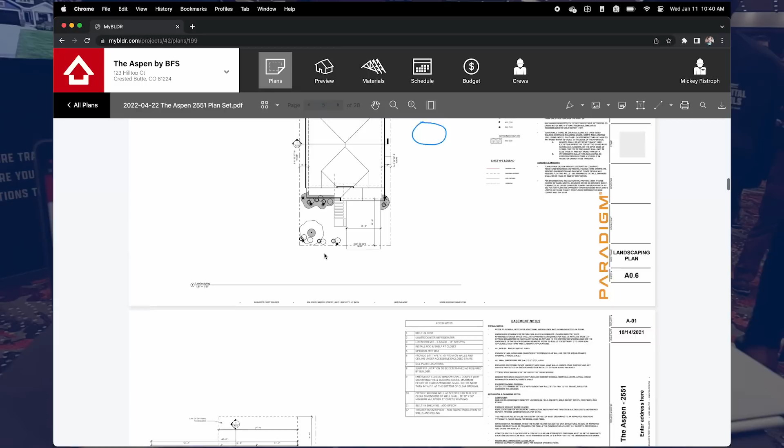And this is first and foremost, this is, you know, document storage for everything you need. We've got the plans, but advanced renderings, videos, you got all your files here. I'm gonna click into the main plan set, and we've got all these sort of rich viewers built right in. So this isn't like your downloads folder and futzing around with that.

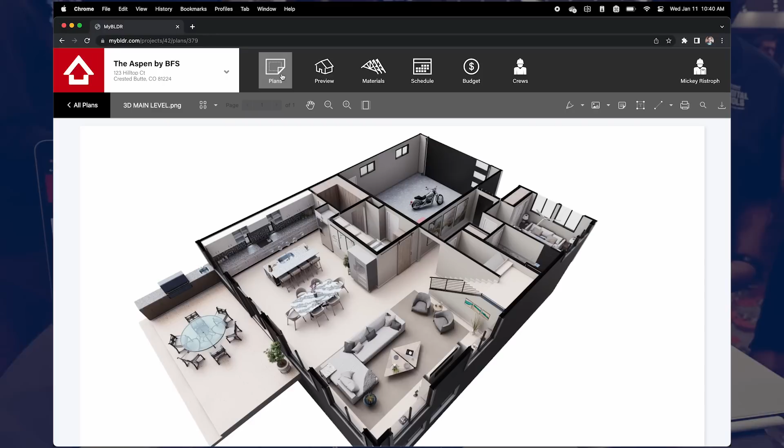Wi-Fi is kind of slow here, but right when I click into this, what it's actually doing is rendering that whole plan set right here in the browser. So I can go through here, and when the Wi-Fi catches up, you'll see I can get into anything. Not unusual for us on a job site to take a minute for something to download. Yeah, not too bad though, right?

Not bad, it's, you know, it's not a video file, so it's not a ginormous file size, right? Exactly. If you're familiar with plan markup tools, you got all kinds of powerful stuff here.

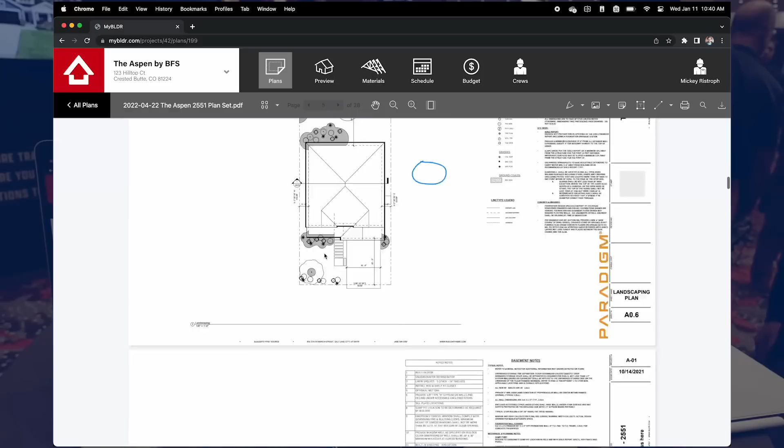So if I'm working on, we know we're gonna have to rework the roof angle on this part, right? All your usual markup capabilities with all of your files in one place. Jumping over to preview here, this is where that other one I mentioned gets super interesting. I'm gonna actually hand it over to my colleague, Kelly.

So with Home Configure, what the product is doing is taking that same 2D plan that Mickey just showed, turning it into a 3D model, and then actually showing a photorealistic visual of that model. There are a ton of features that go into this thing, but I'll hit a few just to start.

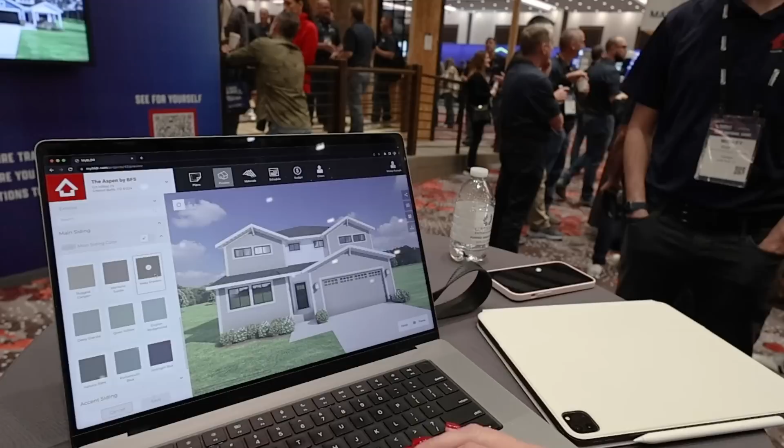So the first thing that we can do is we can change all of our different exterior products. We'll just change the siding color to show you what that actually looks like. And then in addition to that, we can actually change fit and finish details.

When we go to the inside of the house, we have a full 360-degree view. We can spin around in a circle, look at different plan options, and begin to change things like flooring details and wall details as well.

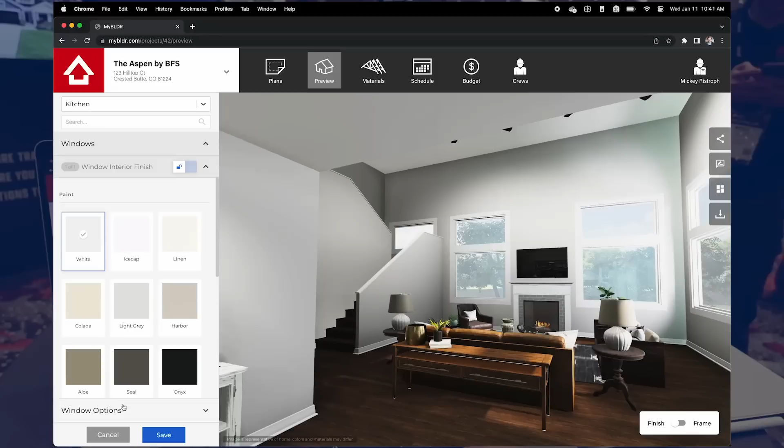If I open up the window options and turn them on, it's going to change the actual geometry of the house, where we can see upper windows added and more light coming through. It makes it a whole lot easier for buyers to see what's coming from the 2D plan and turn that into something they're actually going to walk into. What we're trying to do with the product is give the everyday buyer transparency into what they're purchasing, much like how we purchase a car today online by configuring it.

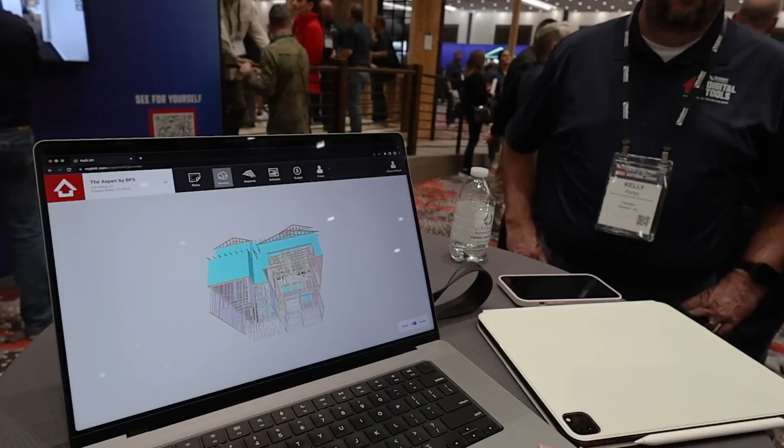So there's all kinds of things we can do with this 3D model. Another capability you might notice is this finish-frame toggle down here. I'm going to switch to the frame view and look at this. We've got a full three-dimensional framing model of this house.

This is all accessible on your iPad and everything else, so if you need to double check, you know. That's the best part of that—showing clients, but for me, actually on the job site, that's the best part right there, for sure.

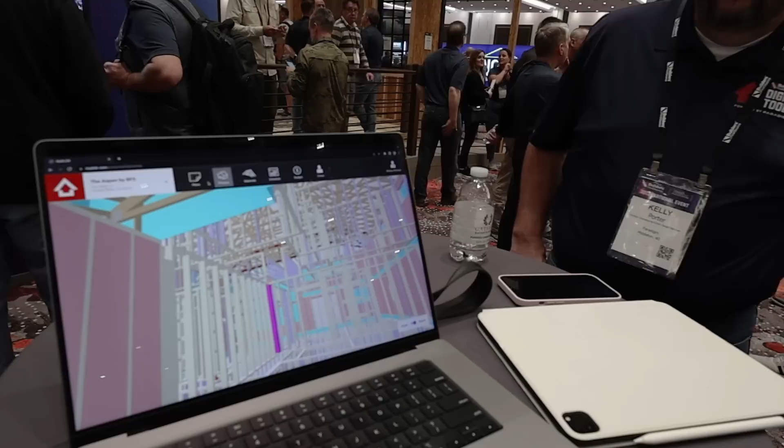So we've got this full framing model, and this is fully connected to your suppliers like Builders FirstSource. We build this model to get your material lists right, and that's available in our materials tab too.

This is when you request your bid from your OSR at BFS. They do that full takeoff for you, organize it into your packs for delivery, first floor framing and so on. What the materials section does is give you a comprehensive dashboard on the million parts it takes to build a house. This is organized by each delivery you're going to get—this is the first floor framing that's ready for purchase.

You can click into it and actually place the order right from this thing. This is the first time we're actually transacting online with our builders. And of course, you can always call your sales rep, we're here to help, but you can do all this on the go. And it has the address and everything already built in, right here on the job itself.

It already knows if it's a crawl space or a first slab or anything like that. That's helpful. And as that build progresses, once we place that order, we confirm it, you'll see when the delivery is coming, you'll know exactly when the materials are out for delivery, and best of all, when it's delivered you get job site confirmation and delivery photos of the drop off at the job site, all within this one platform.

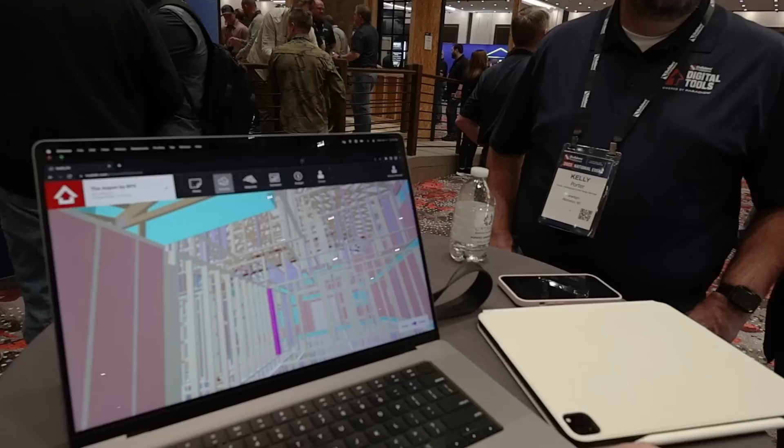So that's materials. The next thing I want to show you is back over here on schedule. How do you do your scheduling now? Buildertrend—yeah, we know there's a lot of software out there like that. Scheduling at its core is a list of materials, and you can do all the usual stuff you'd expect in here with your task groups and so on.

The really exciting thing for our schedule and budget tools—let me jump over to budget, it shows it best—is that again, this is all integrated. The cost, your jobs with BFS, your orders with BFS for this project, fully integrated here. These are the ones from BFS, so those are automatically imported into your budget. Of course, you can add all your other costs here too, all in one place.

And then crews, this is where we think about managing—one of our guys told me he counted 550 people setting foot on his job sites. We know it takes a village, right? So what I want to show you here is how we keep all of those stakeholders on the same page.

Let me actually open up my iPad here. I'm going to invite in my Gmail address—pretend, like maybe this house has some really complicated masonry work or something. I'm going to add my Gmail here, and if I get this going on my iPad, this is where we're going to test the Wi-Fi. You see that email pop up, right? I'm going to tap into that.

No, let me just tap into this. So your subcontractors, they don't have to set up a password, they don't have to do anything. Literally one tap and boom, they're right in the job and get to see all the documents. No download or app to get, no passwords, no nothing.

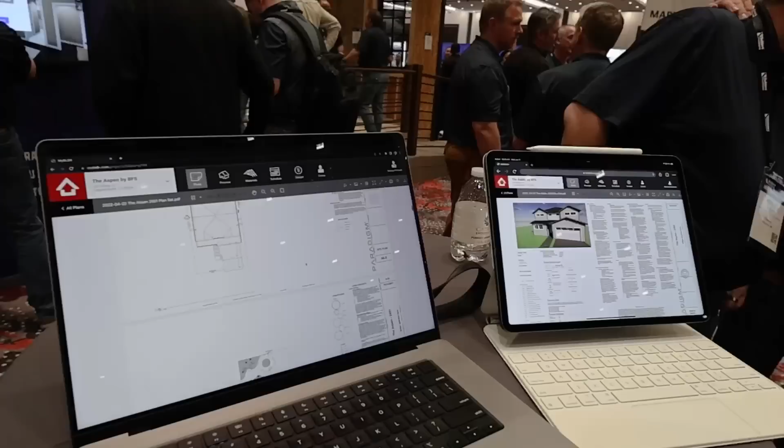Okay, so here I am as the builder, right? Let's say you're working with your roofing guy on this. And so while I'm over here making a note of something, here. Oh wow, it's all live, real time. I'm the roofing guy, right?

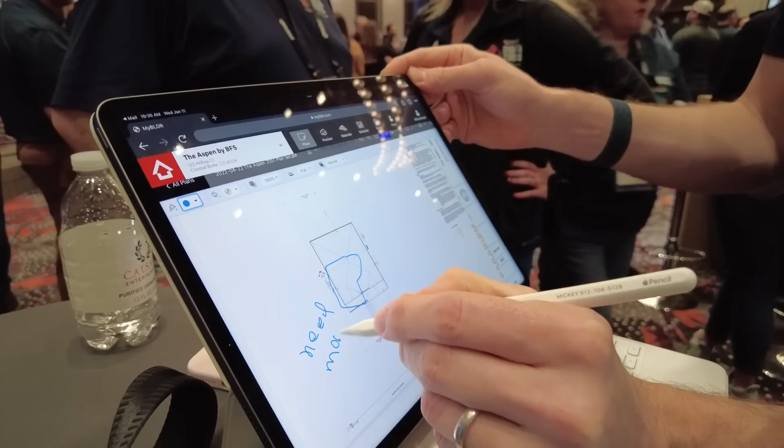We need more sheathing here. I'm making a note of it here, and then look back over there. So this is, holy cow, check it out. So it goes from one to the other that quick. Yeah, these are totally real time.

So get all of your subcontractors in this tool. Everybody's working on the same page, no more mistakes. No app, no download, no passwords. Yeah, that's the best part, because that's your problem, how much do you want another password? Yeah, another thing they got to remember.

And just to jump into my 2 cents, then all of this could go to you moving eventually to Ready Frame. Right, because the whole house is built in 3D, so it'd be no big deal for them to then Ready Frame cut your package. I've seen you do the videos of them, so it's definitely something I've thought about.

Yeah, pretty cool. And then the best part is all of this is just the beginning. This is the tools that are right out of the box, but there's tons of services you can get through us, Build Optimize. We can take that same framing model, pull it in and start modeling up your HVAC, solve all of your collisions. Those are all extra services, that's not just click it through the software itself, but start working with your local team and we'll get you set up.

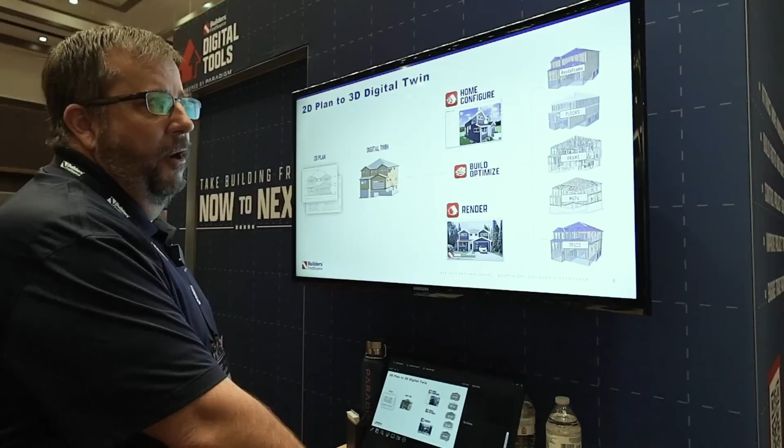So Pete, Build Optimize is all about taking a 2D plan into a 3D model, and then all the other things it's able to feed within the Paradigm offering. This is just a short little clip we've got where it shows what a house looks like when it's all in 3D, and we really start slicing it up.

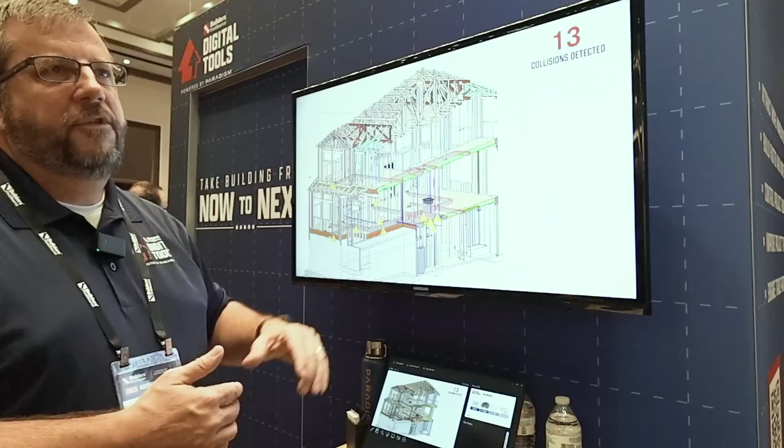And what are we looking for? Errors, issues, conflicts, anything like that happens at the job site. We want to stop predictable problems, right? As this starts slicing this house back, you can start to see where we've got issues with the floor system.

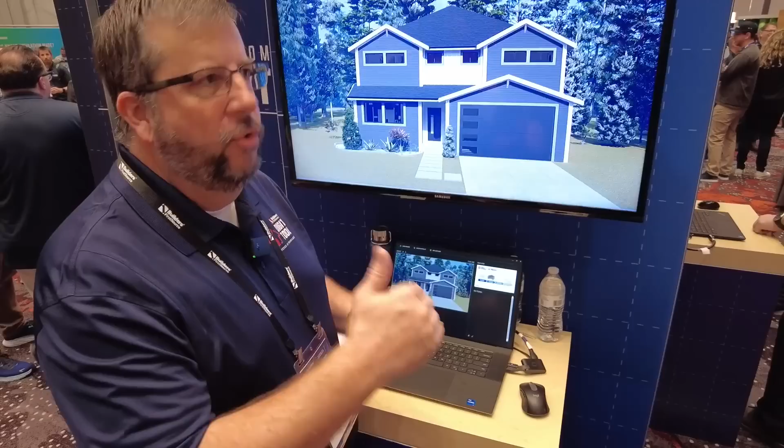We noted several conflicts within this project, having coordination meetings with all the stakeholders, we talked about it. We're not here to design the HVAC system, we're here to model it, so that we can point out those types of issues for you and any of the other stakeholders, and then have you meet with your trades and say, hey, let's move this trunk line, this HVAC system, this attic scuttle hole. This is a better location, this is where it would fit better.

Okay, so that's all about creating that 3D model. 2D plan, 3D model, to clash detection reports. Those reports are something that we use as we coordinate, but we can provide those to you so it helps you move to the next level. We're not here to replace the architect or engineer. What we're here to help do is give additional information that gets left out.

Yeah, absolutely. It's all about, at the job site, what do the trades start doing? Making those decisions that you may not be involved with, that you should be. Our workflow, again, we kind of hit on this, an execution plan. What are your goals and objectives of having a BIM model done? What do you want to look at, what do you want to see?

That's what we want to know beforehand, and then we model it, and then we do the iterative process of where we look at the model and get on the phone with you, get in meetings, face-to-face, whatever it is with your trades, and we loop back through it. Here's the issues, how do we fix them? Right, and we've done it numerous times.

There's 20 issues, we fix all 20, we find 2 more. We go and do it again, right? We just keep working through it until everybody's satisfied that we've got it. And in some cases, after we get those 3D models, homeowners look at those plans and go, can we do something different in that space? Can we move something? I don't like the way that window looks. That's something we're able to help with. Or it's like, this could be tricky to frame on site, maybe we ought to do this balloon wall first. It helps the staging at the job site. They can see how some of that stuff goes together, doing it here virtually instead of at the job site where they're wasting time.

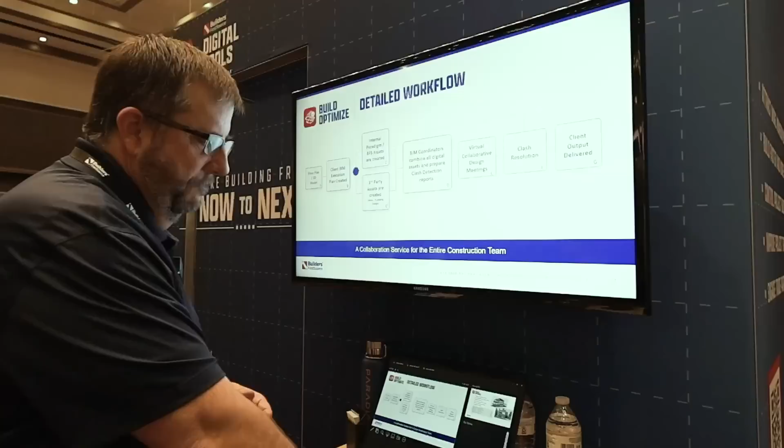One example, we were able to really slice it up - they had the HVAC system in 3 places depending on what drawings we looked at. The architect was like, I'm so embarrassed, I can't believe we did that. We helped them out. Next thing you know, the builder is like, that's why every time we built this house, every HVAC guy put it somewhere different. So we helped them really solve through that.

And it's saving money, right? You're not having the guys come back, you're not having the trades come back, you're not having hot shots for lumber, warranty issues, things like that. So it's really key, and everybody wants to know what it costs. We go with a layered approach - to do the framing, we've got a price in there, and then we start layering in the HVAC, the plumbing, the electrical. In some instances people say electrical, those are boxes, that's easy, we don't want to pay for it. Understood, so we can peel that out. It allows us a tiered approach to help budget in order to get the model all the way designed. So that's kind of a high level of what Build Optimize does for us.

Hey guys, let me introduce you to Peter. Peter is a builder that I just met this morning at breakfast here at BFS.

Peter, it sounds like you've seen the build show before. I have, yeah, I've watched your Instagram page for the last couple of years and pretty much watched every video you've made. I appreciate the stuff you put out, it's quite interesting and teaches us a little bit. And the honesty is the best policy - that's what I like the most about it. You're very honest, and I've spent the last 3 hours talking to you, you've been absolutely honest the entire time. That's the most fun thing about this. Thanks, Peter, I appreciate that.

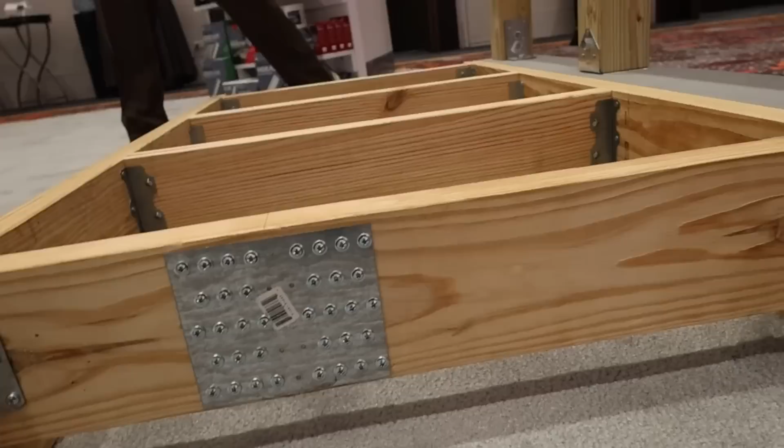Nice. Well, we're familiar with a lot of the other big guys that make them, but it's great to have options. And now that you guys are in the game on that too, that pairs well with your other offerings. We've got ClarkDietrich's metal studs, and then this is super exciting to me. Obviously, we're familiar with metal framing more from the commercial world, but I have only seen this in magazines, man.

Talk to me about Trade Ready steel joist. So you can use a regular steel stud for a joist, but what's unique about the Trade Ready is it allows for your MEPs, your plumbing, your electrical, and your HVAC and everything to be hidden in the floor cavity. That's where you get these larger punch outs.

Yeah, okay, they're typically 2 feet on center normally, but they're 1 foot from the end on either end, and then 2 foot on center, whatever that makeup looks like in the middle. So like a 14-footer, it's going to be even spacing. On a 15-footer, you're going to have like a 2-foot space in one, or 3-foot space in one of them, and then 2, 2, 2, and 2.

So regardless of where I've got to drop my closet flange and get my 3-inch toilet line running out, I'm not too far. I'm 90 this way, 90 that way, 22 and a half, and I'm out.

Right, that'll make my partner Joe happy. He's a plumber, I'm the electrician, so this is all easy for me. But talk to me about the connector at that end versus this end.

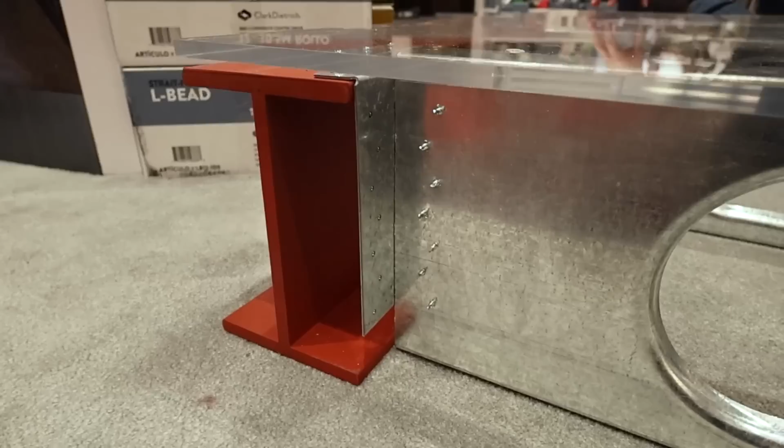Okay, so we talked about the residential versus the commercial. This is our typical commercial hanger. It's sized for a 1 5/8 inch flange stud versus a 1.5 inch wood stud. Okay, so that's what goes onto an I-beam connection.

And then down on this side, we have something called rim track. So what we do is we take a punch and fold out a tab that works similar to a clip, so you can connect the joist directly to it. It's different spacing - 12 inches on center, 16 inches on center, 19.2, and 24.

Gotcha, so this is not an off-the-shelf product? It's all made to order. The rim track is pretty normal, it really is standard, just comes on what punch you want to use.

But all the studs are made to length because you need that edge distance on either end. It's got to be fixed to make that secured connection - it can't land in the hole. If you cut it right through here, you're going to have a web crippling issue. You can't put a wall on top of this because you'll have a web crippling issue.

That makes perfect sense. So this is something that if somebody wanted to know more about, if they were thinking, I want a dead flat floor, steel's the way to go - they're maybe going to want to reach out to you and get involved with the engineering stage, because you guys have tables for spans on all this, yeah?

Yeah, you don't need necessarily to get into engineering. We have technical sales managers, and that's part of my group. They can reach out to us directly and we'll help guide them through the load tables, the span tables, and everything we have. And if we need to go to engineering, ClarkDietrich also has engineering services - we've got 4 of those offices across the country and about 60 engineers across the country.

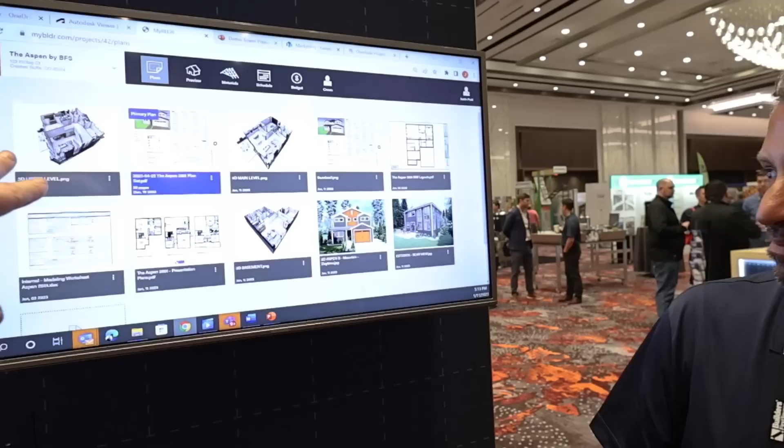That's awesome, Tim. We got a bit of a tour earlier on mybldr.com. How much of these tools are available to builders today?

Yeah, there's a lot that's available today. For example, home configure products available today, drafting, build optimize, plan library, render, all of that's available today. MyBLDR, we're rolling that out on a pilot basis starting this month. We'll open it up to all home builders registered with BFS in February with limited capabilities, but over the course of 2023, we'll continue to make investments and roll it out to more customers and more markets and continue to increase capacity.

It's exciting stuff, Tim. Really appreciate you having me out, man. Yeah Matt, we're real excited to have you here. All right brother, have a great rest of the show. We'll see you later, thank you very much.

All right guys, next up Ready Frame. I've queued up Terry, the head guy, to give us a bit of a tour. There he is. Hey Matt, what's up Terry? How you doing, good to see you brother. Thanks for stopping by today, we really appreciate it.

So Terry, somebody watching this who's a builder and not familiar with Ready Frame, how do you explain it? Give us the quick tour. We're taking a builder's two-dimensional plan and creating a three-dimensional image so we can review the connecting points within the house and make sure we don't have anything causing conflict during the build that slows it down. We want to go through that process ahead of time so we remove all the things that cause you to pause.

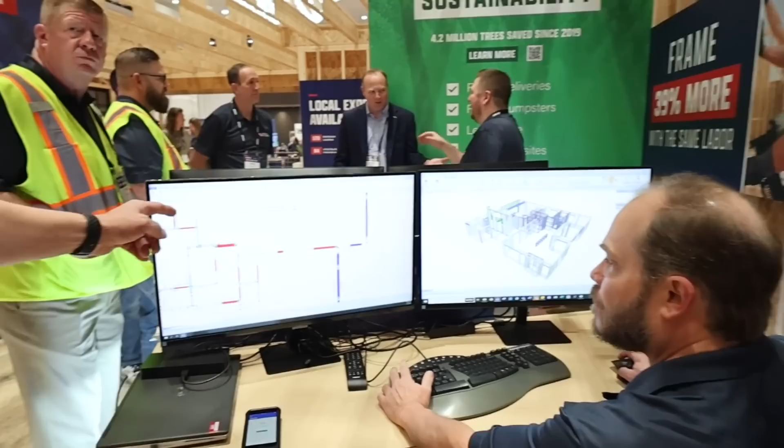Got it, and you can actually show us that, right? I can show you that right here, Matt. If you come over here to Gary, he has one of our Ready Frame models up on screen. We have the layout of the house here, and we have a three-dimensional image that we can turn and look at in order to find these connections that are not matching up.

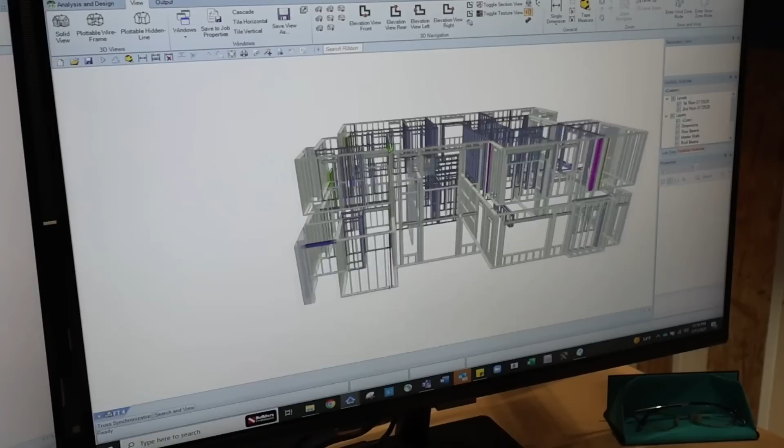So in other words, you take the plans from the builder and the architect that are 2D, and you're able to turn that into this 3D framing plan. And this is not showing floor trusses or roof trusses yet, this is really just the wall framing package. Correct. And in a minute, we're going to show you guys how that turns into this fully framed house here.

Anything else that we need to talk about on kind of a brief intro to Ready Frame?

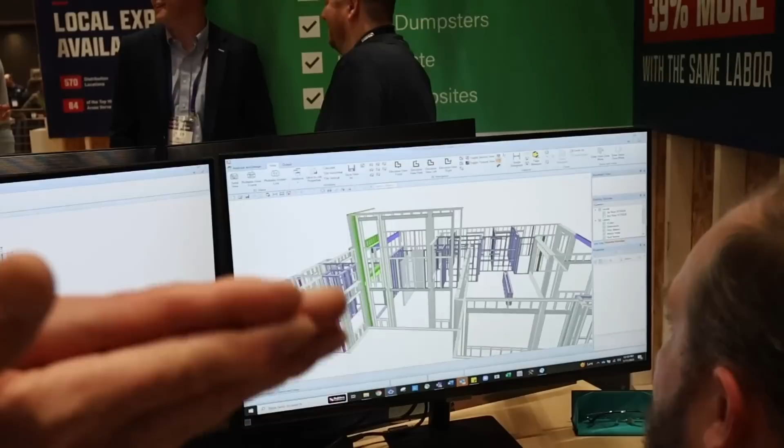So part of the process, Matt, is reviewing this plan, and once we're solid and have a solid plan together, then we take that information and send it to our Ready Frame saw. We take that information and send a cut list.

How many locations in North America do you have that have Ready Frame saws and have this capability? We currently have 32 locations across the United States that have Ready Frame capability. Last year, in 2022, we produced over 33,000 Ready Frame units across the country. Holy cow, that's crazy.

And this house is an example of that, right? Talk to me about this house that y'all built on the show floor here. Exactly. So what we've been able to do, Matt, is by creating all of the different lengths, we've been able to put a frame package together here that has been pre-cut and labeled with all of our Ready Frame marking.

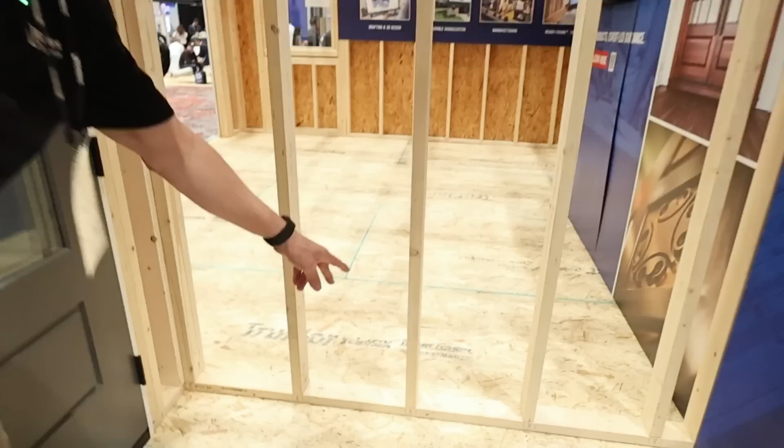So if you guys have seen my videos before, what you're looking at here is a bottom plate that came pre-cut to the correct size and labeled. You can see that X there, and that's going to be just a stud off the stud pack. And so all that happened as part of that 3D process, that the cut system knew what to do, and then this got delivered to the site, right?

Correct. So when we were able to put this package together and communicate with our framers as to when this package is going to be here, they have solid information that they can plan on in order to have the right amount of people here to put this house together.

When we dropped this house, this model home that we built for the show here, we dropped this on Thursday afternoon, and we built this house in 9 hours. How about that? Because the whole package was cut. 9 hours, that's incredible. Absolutely. So we did that through obviously roof trusses that we have overhead.

We have open web floor trusses in the bottom that we can see through. Let's go walk the backside and see those. I'm a big fan of floor trusses, but not every market is used to them.

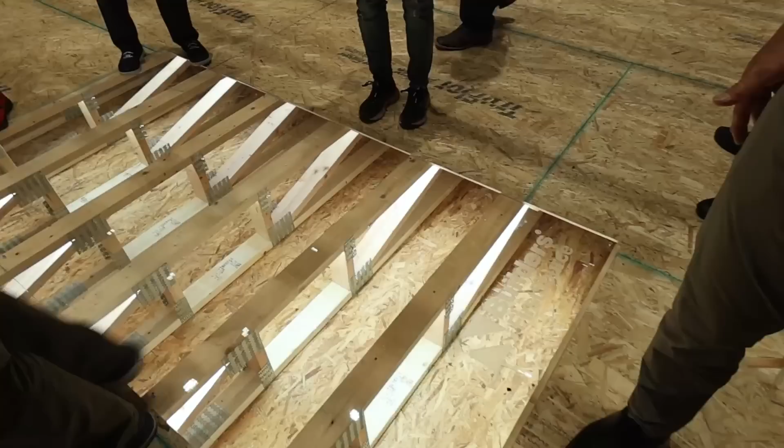This is basically a 2x4 truss that you guys make in your truss facility. Correct, similar to a roof truss, really, with 2x4s and connector plates. But this is an engineered product so that you know it can meet whatever requirements the builder's engineer has. And then a couple things I like about them is look at that 2x4 top plate there. Lots of glue surface on that, and then nice open webs.

Yes, but also as part of this show house, you're showing engineered I-joists, which is pretty common in other markets as well. That's correct. And here as well, Matt, we have the layout for all of the ductwork and the runs, and we pre-cut those holes, again trying to speed up the building process.

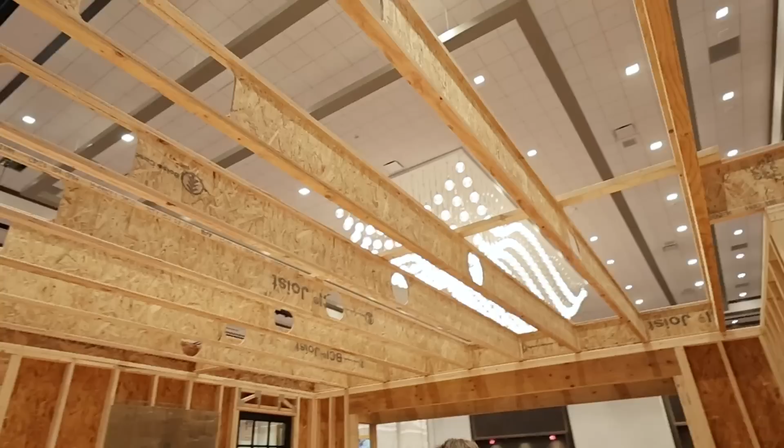Yeah, that's pretty cool. So check this out. All these cuts you're seeing here on these I-joists were engineered so that they know exactly what the house and the loads are going to require.

And they can integrate your mechanicals as well into the process. So they know, hey, we've got a big trunk line going through here, let's open that section up. And you can see they're all perfectly in a line right here, and they're even pre-cut before they come out to the job site. Same with maybe a 6-inch duct over there with those knockouts. Pretty cool, Terry. It's an incredible system.

So you can see here, this frame job is very clean. Every piece on this house was cut to within 1/16 of an inch. Imagine if you had all of those tolerances in all of your construction homes, it would make a huge difference.

That's a huge difference. Terry, I built my very first Ready Frame house this past year with you guys. I don't know if you saw the video. Yes, I sure did. We did it for Luke and his wife. And the two big things that really stood out to me building that for the first time was the lack of waste, how little was in the dumpster at the end of the framing job.

Yes, and also the speed of the framing crew was huge. Yes, and frankly, also the fact that it was a much smaller crew than we normally use. Will you talk to those two points?

Yeah, I sure will. So we've done a number of independent studies which have shown that you're going to increase your labor efficiency by 30% as far as how fast they're able to go through the house.

And then also 39% improvement on the board foot production per hour of framing during the course of the house. So imagine one person, you're just increasing their ability by 39%. Then you take the dumpster factor into the house as well. You're reducing, say an average house like this may have 6 dumpsters. If we could take 2 dumpsters out of there, you're saving a significant amount of money.